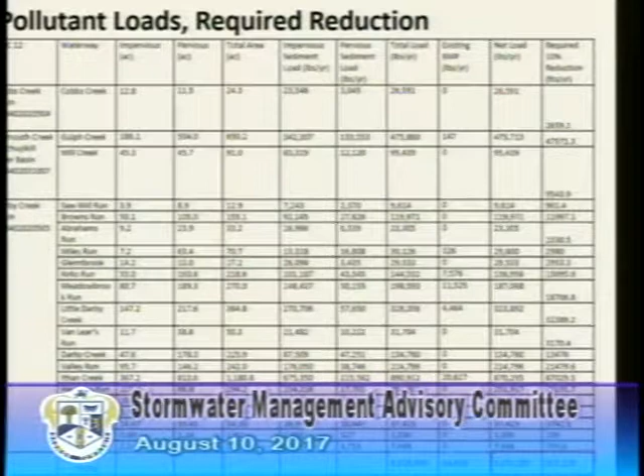Good, so they can get all the background of what it involves. So this was the table as it came out in the draft PRP of the required 10% reduction. It's 307,000 pounds of sediment.

So the next task is to identify, and if you'd like me to explain, this is each of the 3 major waterways, each of the streams, using the DEP simplified method and the Township GIS, updated with the Delaware Valley 2015 land use, and we parsed out areas that don't go to the MS4 storm sewer.

So based on that, using the impervious areas and DEP's methodology, we came up with pollutant loads for each of the stream segments. Then where BMPs have been built and the township has information that can be documented, we took credit for what pollutant reduction those BMPs are already providing, and that reduced the net load down to

3.072 million pounds of sediment is the township's current estimated load to the MS4 system, and you're responsible for a 10% reduction in this 5-year permit. So 10% leaves us with 307,000 pounds of sediment to be managed in different projects over the next 5 years.

So the next task is to identify potential projects, what their potential load reduction is, and then develop associated cost. We don't have costs yet. We have pollutant loads for the different projects and the types of projects.

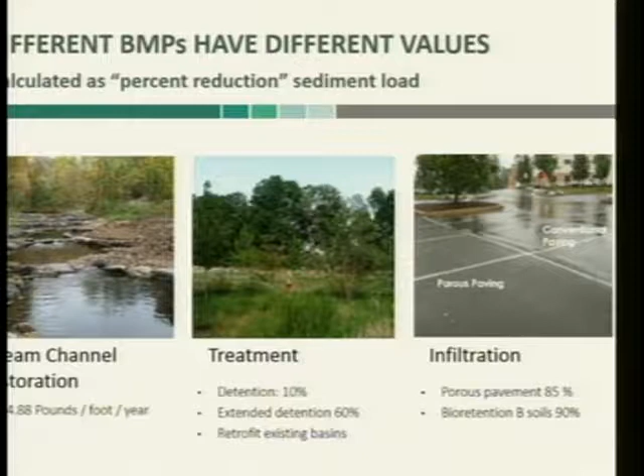And we also looked at the projects that were identified in the CH2M flooding study. So where those projects have been identified, we've pulled those in. This gives an overall summary of the projects that are in the draft pollution reduction plan.

So there's a total of 25 total projects, I guess, and you can see how they fall out in terms of the watershed they're in. Most of them are in the Darby, 17 projects, your biggest watershed. 1 in Cobbs Creek and 7 projects in the Plymouth Creek, Schuylkill River major drainage area.

In terms of types, we've got a lot of basin retrofits, we've got stream bank restoration, and you can see how they break out.

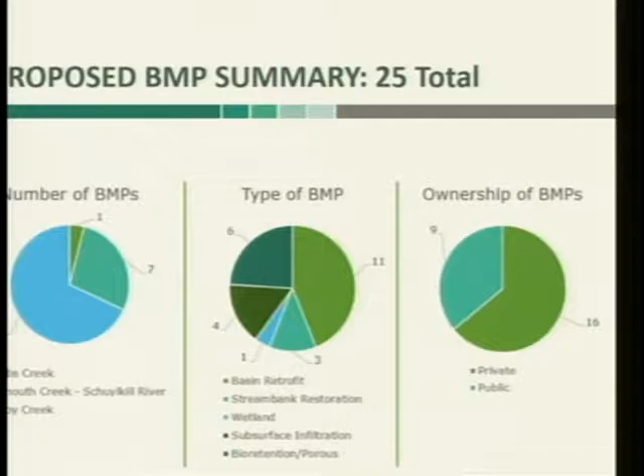And then I think an important topic is where they are in terms of public or private property. Although we have 16 on private property, a lot of those are basin retrofits, so they're private property, but they're basins. So hopefully those would be good candidates for retrofits, even though they're managed by an HOA. So any questions with any of this initial stuff?

Could you explain the difference between the land cover and the sediment loading so that people know? Yes, that's a great question. Yeah, if people are curious, if we go back to our tables here.

DEP allows a couple different ways to estimate your pollutant loading, and one of them is what they're calling the simplified method, where you just look at whether the surface is impervious—a road, a roof, etc.—or pervious, like lawn or woods. They've applied strict pounds per acre per year values: one value for all impervious and one value for all pervious.

That's not absolutely true, and DEP does let you do other methodologies where you look at the different land use types. We did run some early numbers several different ways, parsing and not parsing, and found that this was giving us our most effective numbers for Radnor for this initial analysis.

So it's literally pounds per acre per year from pervious times the number of pervious acres is your pounds from pervious in terms of sediment load, and then the same thing for impervious. We don't have the actual pounds—I don't remember what the numbers are. Do you, Mark? I don't know if we put them in the PowerPoint.

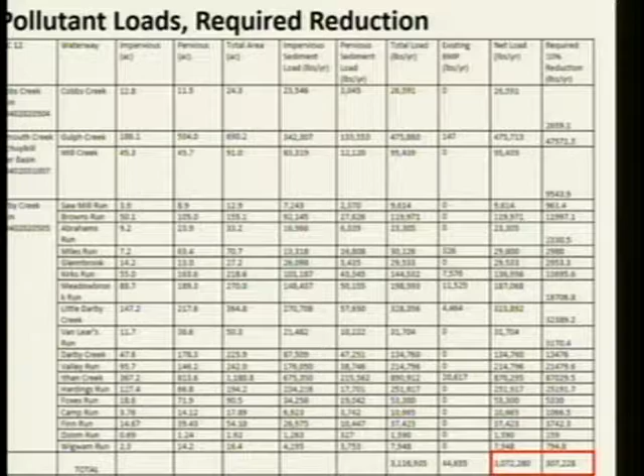You want to focus on capturing as much impervious area as possible, because that's where your load's coming from in these calculations. We have a table later that looks at the different BMPs and how much impervious they're capturing per their drainage area, so you can look at efficiencies.

Does that explain it? Yes, because I wanted to point that out since not everyone understands that. As well, when we're looking to revise our stormwater ordinance, simply removing impervious cover throughout the township could help assist in meeting these goals. It can't achieve it alone, but it could help, and all of those things can add up.

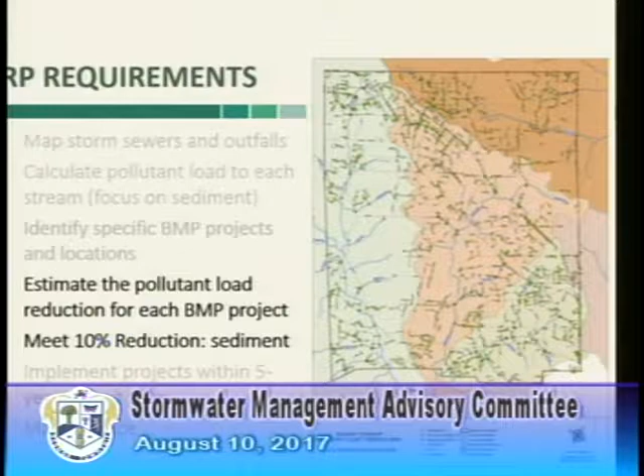So this is sort of the summary, and the next step we've been busy with is estimating the pollutant load for each BMP and looking at costs. We're in the process of developing costs, and we're striving to have initial costs to talk about at the Board of Commissioners meeting on Monday.

Mark will be here in the hot seat then.

So we put more practices in the draft PRP than Radnor needs to meet its required permit goal. We overshot because you're going to make choices. You can see your requirement is 307, and we were at 433 potential. But not all projects are equal.

Down at the bottom in the red box—I'm sorry, it's 307 and 432... 433. A lot of your load is in the Darby, because that's your biggest watershed.

For each of these projects, we have a general location of where it's in the watershed, the drainage area to the project from the GIS, what the project is, and how much impervious it's capturing and what your load reduction is.

So we can scroll through these if you'd like to get a general sense of what's where.

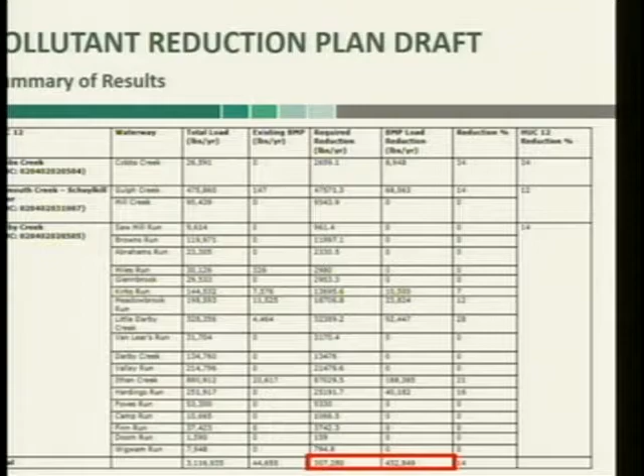But do you want us to jump right down to Darby if you'd like? I think that's our biggest, in general, concern from a magnitude standpoint.

Well, the one thing we do have to note is that we don't achieve compliance unless we do every watershed. So I'm just looking at the time you have tonight, and if we start on the largest one, which is going to be the greatest magnitude from a project and cost standpoint, yes, it's across the board, and that's what the Meliora plan shows.

So going to the board meeting next week, this is for both of you. Are we going to go in with the whole MS4 and the additional projects, or are we looking to the board Monday to see this list of projects and say, okay, we're going to do A, B, and C and not X and Y? Or are we just going to submit everything, give us a little flexibility, and then go back in a year if we had to and amend the plan to be more specific?

I guess yes to all of the above. So what we're going to do is meet again Monday internally and try to give a palette of projects to the Board of Commissioners. It's a lot, as you can see, a lot of projects over a 5-year period. There are big questions about the feasibility of even getting them all constructed in that time, with permitting and the ones on private property, negotiating with the various HOAs to get that done. But it's the law, we have to do it. We'll present that and have them give us direction. But as Michelle has said all along, very tight timeline, we need to meet the requirements. So literally, once we submit and we've met our deadline, right back to the drawing board, and we start getting deeper and deeper into what we need to do.

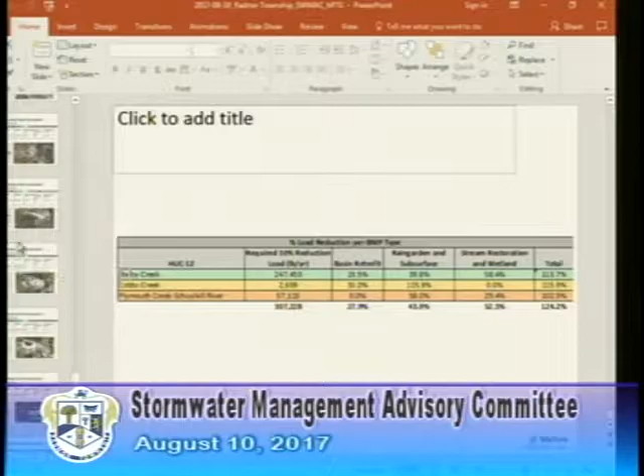Let me ask a question about that slide. Again, for me and for the public, is there a fraction accounting for each of those that leads to that percentage? Yes, we have a table for each project that says how much pollution load reduction it does. So when we add up all the projects that are basin retrofits, existing detention basin retrofits in the Darby Creek, the ones we've looked at in the PRP get us to 15% of the required sediment load reduction in Darby, and they're going to have a cost as well.

But does something like a stream restoration give you more bang than a basin retrofit? Yes, yes. And so what we're starting to look at is cost per load reduction, and we have some tables we're not ready to share yet, but we'll be ready, I think, on Monday. But yeah, where to start?

So let me jump back up to... just a further question about the methodology: you picked the basin retrofits because they're the least expensive, or the quickest, or both? Both, they're cost-effective. The infrastructure's already there, taking your stormwater to one place, so they're cost-effective, and they give you a good pollutant load number. Kind of a quick question on the basin retrofits, is there any characterization of what that is?

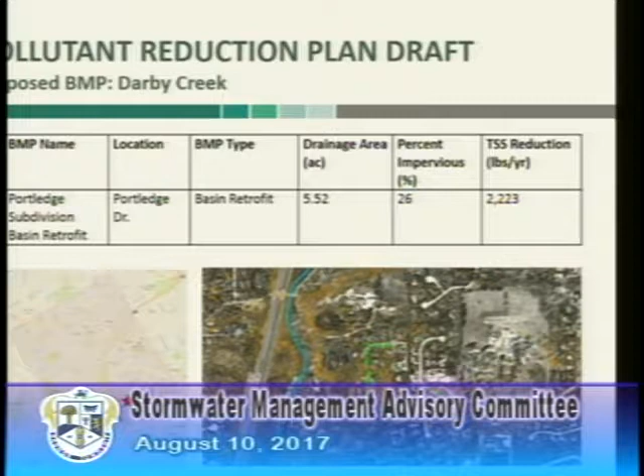I can go through these quickly or slowly, whichever you'd like, if you want to talk about what these are and where they are, or I'll just roll through them. I think you should just go through them unless further clarification is needed.

These are all basin sub retrofits, and we've met with Steve and your staff to go through a number of the basins in terms of what are good choices.

The Portledge Basin that was just shown is off of Clyde Road, directly upstream from Ithan Creek. Prior to this whole topic ever coming on board, we'd already met with the HOA concerning their basin, so it looks like there may be a good possibility of working something out. The carrot would be that the HOA would no longer be responsible for the basin, so they get that off their table.

But there is a process. There's going to be indemnification and memorandums of understanding. So five years sounds like a long time, but I think the pipeline is going to be a little bit slow till you can really start cranking these things out.

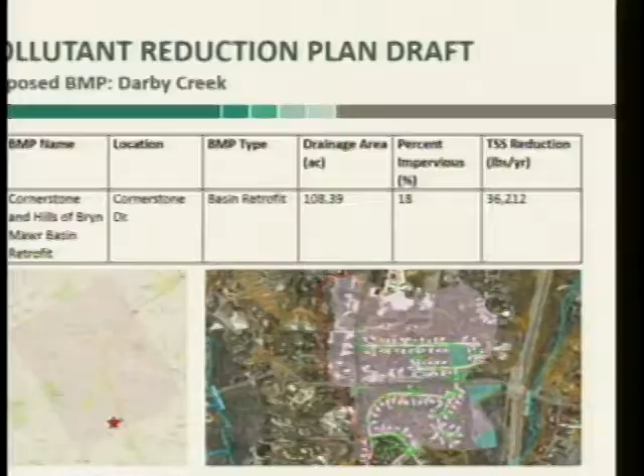Cornerstone Basin, that's a pretty big drainage area. It's go, a really good one actually. If you go down Bryn Mawr Avenue, southbound from County Line, from the hospital, eventually you cross Mill, and on your right is Ithan, which is also the creek. Just below the Blue Route, on your left is the massive basin for Cornerstone, which has an old-fashioned low concrete, low-flow channel.

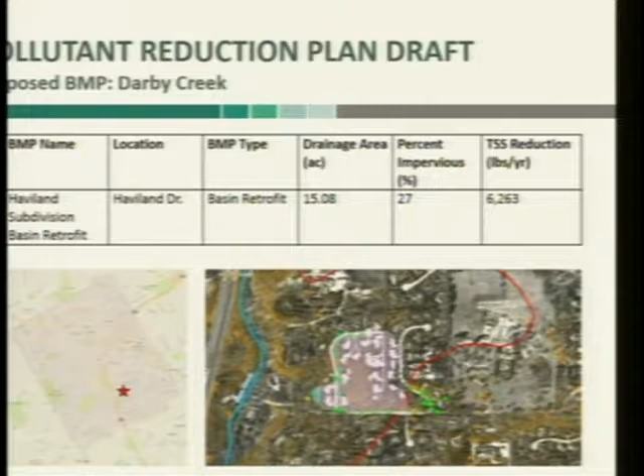Was this something that Dan talked about? There was some project around Veterans Park. I just wanted to make sure there's a connection. There is. Okay, and where we've used the CH2M projects, the drainage areas and the costs we'll be sharing are all from the work they've already done.

So this is stream restoration. Just a quick question on that one — is it also a flood reduction measure? Yes, thank you, yes.

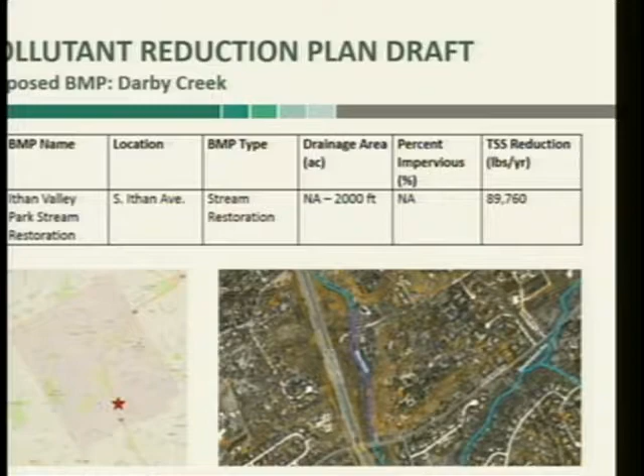Ithan Avenue stream restoration — this is the first stream restoration project, and as you pointed out, Steve, it's something the township has already considered. We did a bond issue for our parks, and Ithan Creek runs through Ithan Valley Park, where part of the stream is severely eroded, affecting a very old wall that runs along Ithan Avenue. So there's already a small amount from the park standpoint for that, and it seemed to make sense to address this creek. It's highly impaired, we get great return on the dollar for doing this kind of work, and there's already an impetus to start.

And you can see what a big player it is in your 307 total, how important this one is.

So, another park project with a potential infiltration bed. These stream restoration projects again give us good pollutant reduction in the DEP credits. Another basin retrofit, getting highly impervious in Devon Square.

I'm sorry, I don't mean to interrupt, but I have a question for the SWMAC. So the Warren Filipone parking lot was part of the bond issue for the parks.

And I'm in the design phase of that, and basically the parking lot has failed in many places. So I just pose a hypothetical to the SWMAC, which would maybe go to the Board of Commissioners. Instead of just doing the normal repair, which is basically mill off the entire surface, redo the subgrade, and then pave the lot, perhaps it would be feasible to still do that much with the bond money, but add stormwater fund money and get one of our first infiltration parking lots in the town, other than what we have at Clem Macrone on the pads.

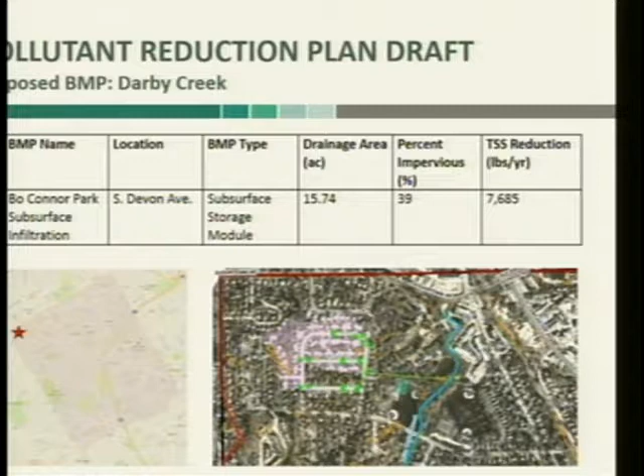So again, I think, at least my interest is where can we get flood reduction as well as... These two, like I said, Chagrin Valley called them out for flood reduction. CH2M called them out for flood reduction, both these parks. And Meliora is calling them out for sediment load reduction. So I think exactly what you're saying is possible.

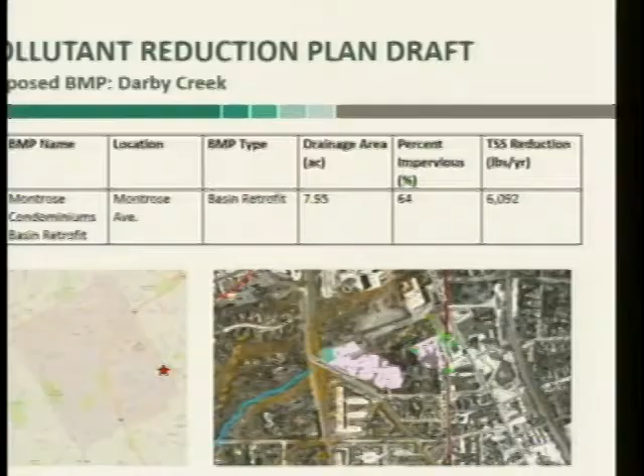Okay. Another basin retrofit at the Montrose condominiums. So these are all in the same vein. This would actually be a new project, putting in a bioretention area at the Radnor house. We get a pretty good load reduction in drainage area, but the costs go up with the newer systems rather than the retrofits.

Can you go back to that one? That's a pretty steep lawn, right, in that area? Here, where's my? On the one side. So you're down at the bottom, or you're up at the top? I believe we're down at the bottom, but we were also looking at where the piping network could convey water to and where it could fit in topographically. And these are concept level, so.

Yeah, because I don't think anyone actually uses that ground for anything, right? It's just mowed lawn, I've never seen anyone on it. So that might be a good thing to look at. There's some utilities that go through there, but they can be moved. But it's not like it's a park or a used space. No, it's private property, it's theirs. But they don't really use it for recreational purposes. It's just decorative more than anything.

And where we show a new project like this, when we show a footprint, a size, we're following the DEP guidelines in terms of drainage area ratio to project footprint size. So they're following the design guidelines.

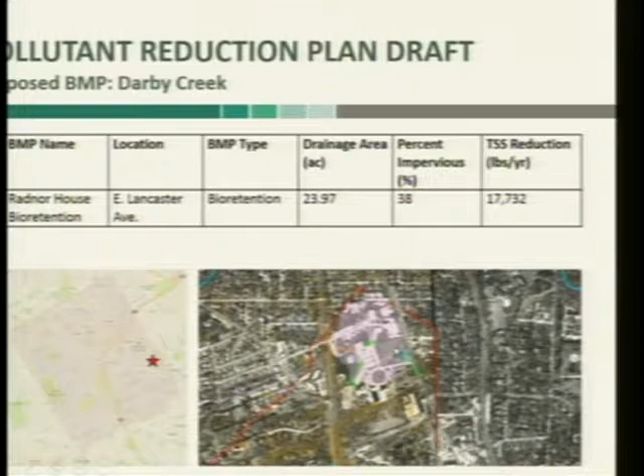Villanova campus improvements. Are these additional ones, Mark? No, these are what's already there. Oh, I know what this is. This is because they're not built yet. They're not, that's why they're included. So this is the Villanova project. So it gives you credit, gives you good credit.

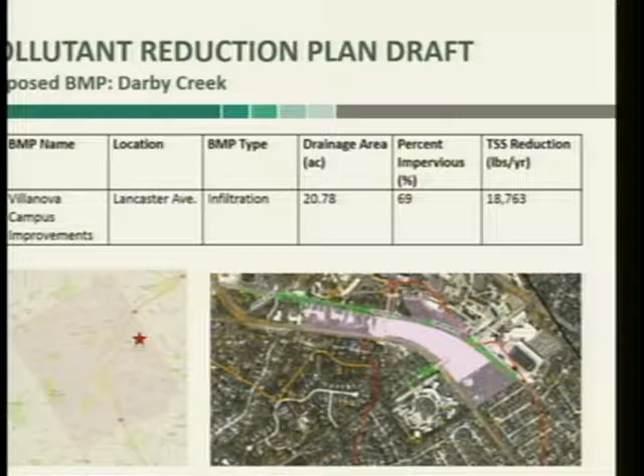This one is a big parking lot, and it could do a good load reduction. Our initial costs are also showing this to be expensive, and it's on private property. So these are the factors that'll come into decisions and timing. So that would be like taking the whole parking lot and making it? No, this is taking select areas for putting in bioretention areas or retrofitting. I think there was also a small basin. So it was retrofitting a parking lot. But even so, it was a bit costly, you're saying?

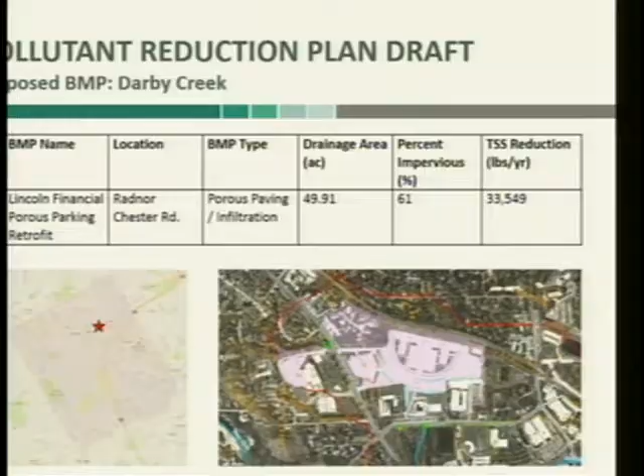Where you retrofit, the costs are higher than where you have a basin. Is it because of the pipes that are required mostly? And more structural work. Yes. We do have some current projects that are going through approval processes, and we're mentioning to them, you know, if they can help us with our MS4 while they're constructing. So you may be getting contacted by some project. That would all help.

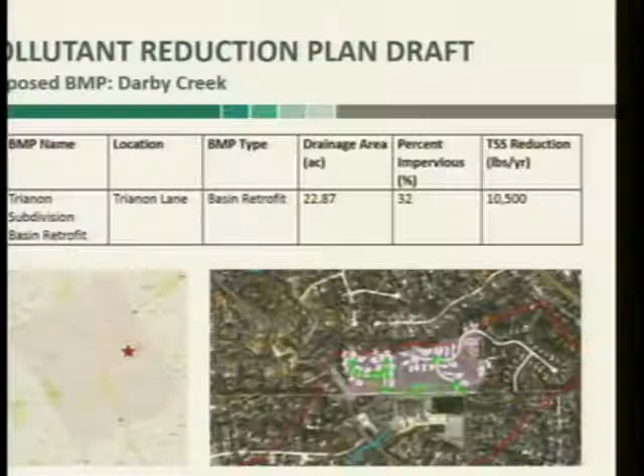Okay. All right. Same thing, a retrofit at the basin next to Lincoln Financial, the property next door. And I think across, at the subdivision, there were some opportunities for retrofitting basins. Where was that? Oh. Yeah.

So it's a lot of data to read, and you can see where we are percentage-wise. Our goal is 10% sediment reduction per stream, and you can see where the projects are taking us. This one in Cobb's is over-designed, but there aren't a whole lot of opportunities in Cobb's, and the permit requirements will continue. There'll be more permit requirements next 5-year cycle, so you would essentially be able to bank credit for the future.

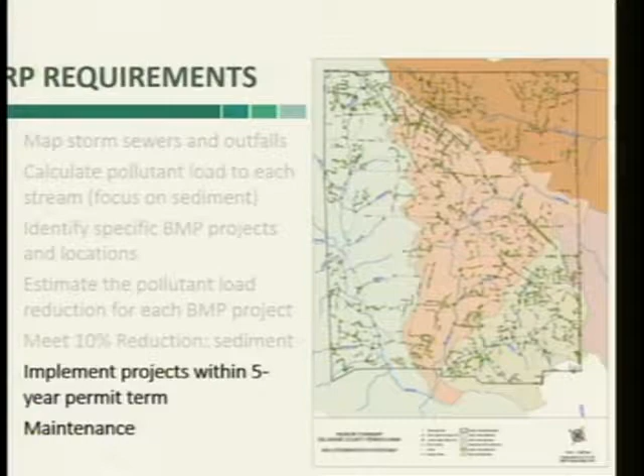Then the question is priorities and implementing them within a 5-year period, and also coming up with maintenance plans. This is the sequence of events and next steps that we'd shared at the Board of Commissioner meetings. So the draft is out, and we need to submit by September 16th and determine the implementation.

Did we go through Cobb's and Schuylkill? We skipped them. Oh, that's right, because we started in Darby. I can scroll back and do. Let me go back to those, because that would be helpful since there's only one in Cobb's. There it is. Where's the? There we go.

So there's not a lot already existing in Cobb's, and there's not a whole lot of opportunities, and we didn't see any good basin retrofit opportunities. But what we did notice is that the Radwyn Apartments is a pretty dense area and has good opportunity for bioretention installation along the edges, and all the drainage is coming this way. So that, as you saw, gave us significantly more. Can you give us the context, the road down the bottom?

Boy, I don't know. Do you know, Steve? Yeah, so the Radwyn Apartments, and I get confused between my apartments too. They're off of Bryn Mawr Avenue. Okay, and so this is north of that Cornerstone Basin. So the horizontal road is Bryn Mawr Avenue, you're saying? Hang on. I'm having trouble seeing it all, even with the big screen. Yeah. And I apologize. We've been working at such a pace. We don't have all our graphics labeled. Oh, I see. Okay, something is the beginning of a label on that one road, but.

If I get my big map of this, I could tell you, but the apartments give us a little bit of hope because there's our residents that live around these apartments, and most of these were built and they predated all our stormwater management. So if we could do some sediment load reduction and help some of our own residents, because it's strictly conveyance at these places, a lot of them, it just goes down the hill into an inlet through a pipe, or it just sheets off. So we looked at some of these.

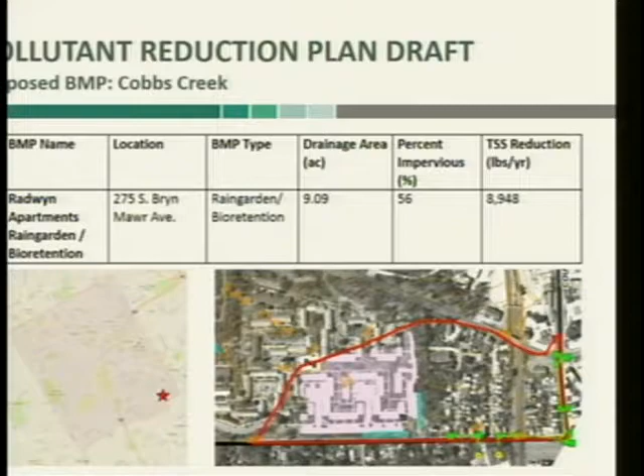Well, unless we come up with something different between now and your revision to the PRP next year. Yeah, we have the opportunity to revise the plan if something steps up in the meanwhile. Or if a door closes on us. And that's what we were saying. So we need to submit by the 16th, get this in. And a lot of how this was done, Charles, was we have these maps out. You're looking at impervious surface. We have plans from things that were done, trying to grab things in that fashion,

plus our own local knowledge from our staff. And I think Cobb's is rather limited because there's such a tiny area in the township. You're constricted to that area in the township that goes to Cobb's, because it goes the opposite direction. Honestly, I think if it came down to it and this was not feasible, we could probably do some trading at some point.

I think potentially they would be obviously open to us making that improvement in another area if it was technically infeasible. Right. But for purposes of meeting your, yeah.

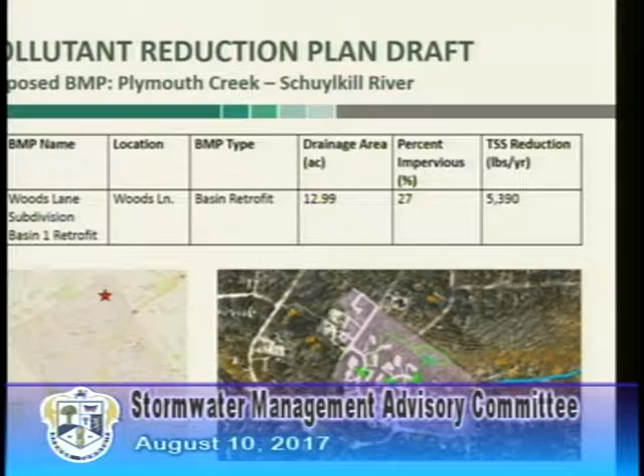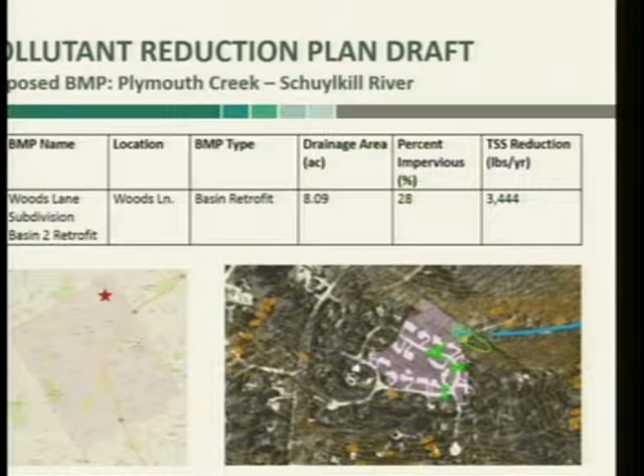I think we looked at this one. Another basin retrofit, Woods Lane subdivision. Two basins there, and then the North Wayne Field basin retrofit.

This one is also a nice load for what it is. This is something different than what's before, so it was removed from the agenda, but what the board directed us to do was clean, repair, and put in a sediment reduction BMP. This is outside that.

Again, looking at land that may be available is how we start to do this. We're looking at maps, and that's how the big Brandywine Realty Trust property came up, when you look at that from an aerial, all you see is a sea of paving, and it draws your eyes to it. Now, as Michelle pointed out, it's not necessarily the most cost-effective way, but between what we know, the developments, the maps, the information we had, that's how we start to do these.

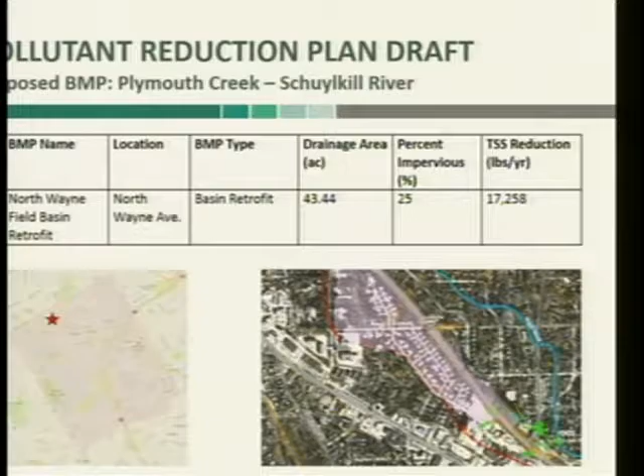I'm not saying that the North Wayne Field Basin is something that could occur. It's a possibility, noted as a possibility, a place where you could do a project. It could even just be that we put in pretreatment, different levels, and maintain it.

Does this proposal mean that we're holding up the repair? No, I think they're mutually exclusive at this point. The direction from the board came a few months ago, the RFP went out, very specific based on the board's direction, and this came out after that. Monday night, this very well may be a topic of conversation. Again, when we pick these, obviously this is school district property, a lot of these are private property. We don't know that we are able to implement these, but we're noting that this is a property where a project could be done, and here's the type of project you could do.

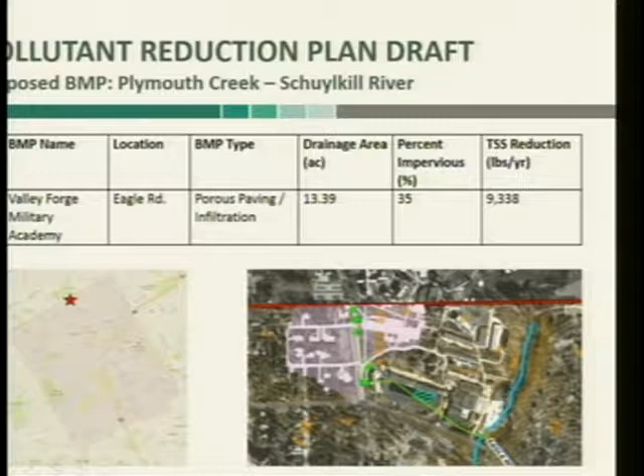All good questions though. Okay, Valley Forge Military Academy, again, private property. This is looking at doing porous paving and a stormwater bed that would collect water from both the academy and from the street. So it's a mix of public water on private property, so those may or may not be feasible.

Steve, when I was driving up Eagle, and you come around, go down, then come around the curve, I noted there's an area they're maintaining that is unmowed on the right side as you're going up the hill. I wondered if that was coming from where I live, from King of Prussia Road. I wondered if they're doing something there, would they be amenable to doing something like that somewhere else? I don't know the exact spot, but I think that's a great question. The grass is this high, it's unmowed, clearly hasn't been mowed in a long time. I wonder if they're doing something intentionally, or just letting it go, but our project would definitely look nicer. I think that's a great idea.

Talking about on North Wayne Avenue? No, if you're coming up Eagle, where the entrance into Eastern is, into Cabrini, and you go up the hill, down to that bridge, then on the right, just before the building, is this big unmowed area. So maybe this could substitute for that, or...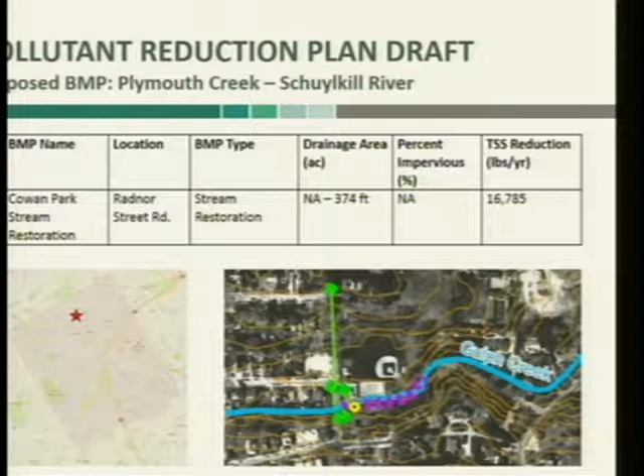Okay, and then we're into Darby, so I'm going to jump to the end again. Table.

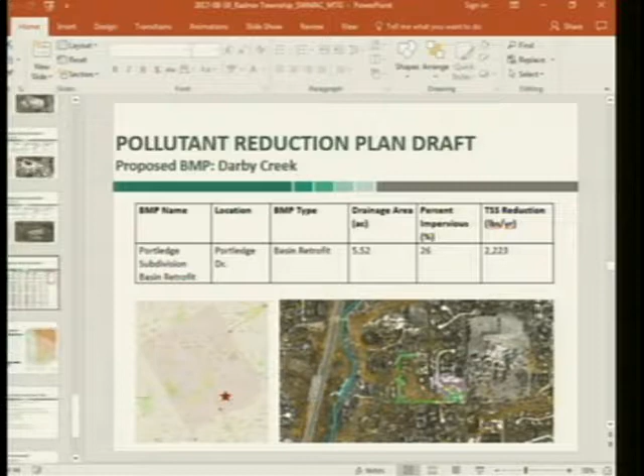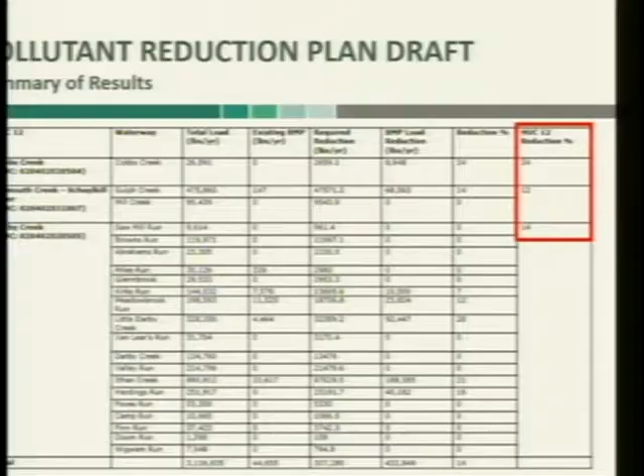Michelle, do you want to touch briefly on the requirements for stream restoration to count for credit? Well, DEP hasn't been entirely clear on exactly the requirements. They're basically general requirements around removing and restabilizing the banks. They haven't necessarily required full analysis of stream channel capacity. So if that's the case, then doing these small little retrofits is fine because you don't have to put a lot of... Well, yes and no.

I think DEP's guidance will be evolving over this permit term, and the permit will expire in 5 years and then be renewed with additional requirements. So we would urge consideration of projects that show in-stream water quality improvements, especially if they're immediately at an outfall of a retrofit basin, if that starts to show better aquatic life distribution. That's where DEP has indicated their goal is, to get in-stream water quality improvements. So if you're showing in-stream water quality improvements, you're meeting the department's goals. And if you're not, even if you're checking the boxes, your permit requirements will never end. So some consideration of healthier streams is worthwhile.

I guess my concern about some of these stream restorations is that we won't have the land area to do what they're really looking for us to do as a stream restoration, because in that location in particular, you just don't have the room, the backyards. Right, so we may never be able to meet what they're looking for in that area. Even though we can make improvements, they won't be what the intention's goal is. In terms of like width?

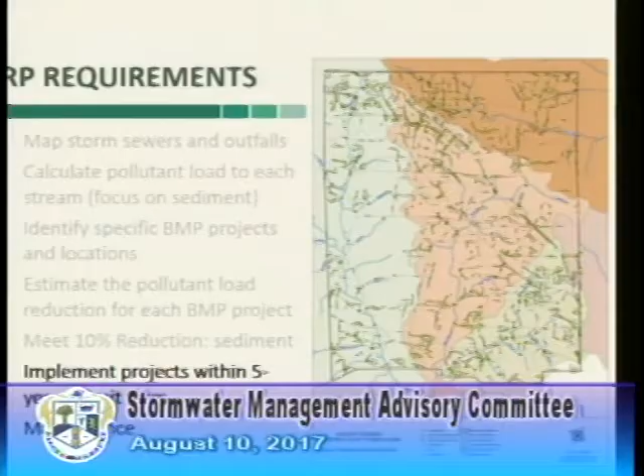Which leads to implementing the projects within a 5-year permit term and making decisions about maintenance, maintainability, and the cost of maintenance over time. That's a question I had for you. What are you envisioning as far as maintenance for these projects? Would you think cost effectiveness would be to train in-house staff or to just contract that out, say, if we were to implement this as proposed?

Yeah, I guess it depends how many projects need what types of maintenance. There are certainly good contractors available now that can do basin retrofit maintenance, things like that, and that know what they're doing in terms of plant species and mowing regimes. Say basin retrofit, what do they do when they do a maintenance?

And I could share a funny story with that if you'd like. Sure. Years ago, we worked on, gosh, this goes back to 2005. We worked on an early basin retrofit for Sidley Basin in East Whiteland, and we had talked to the township about it, it was a giant basin they were mowing every week, and we said it'll save the maintenance crews mowing it every week. So it was retrofit as a meadow and revised structure, and there's signage and a lot of amenities that go with it. And it took 3 years to get it established, and we're like, great, it's all doing great.

And then we got a phone call from the township saying, what did you tell us? Our maintenance guys are out there for hours. And we went out, and it was June, and all the flowers were in bloom. And they were weed whacking around the flowers as if it was Longwood Gardens. So we said, just mow everything. And that was a lesson to us to give a laminated maintenance plan to the maintenance crews, because no one ever tells the folks on the mowers what to do.

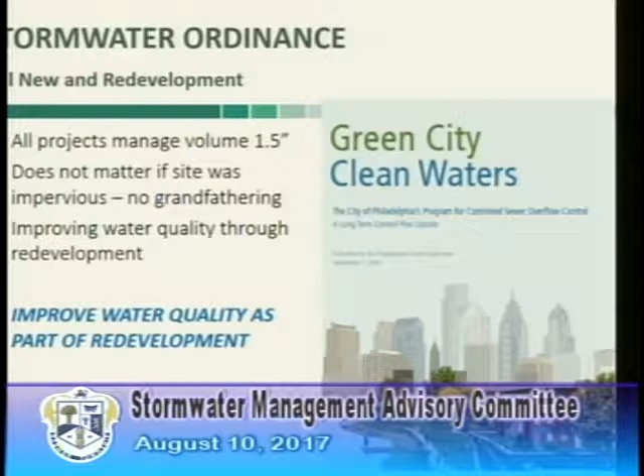So it's something that's probably worth discussion in the context of your ordinance. And there's precedent in the city of Philadelphia, and they haven't -- they're continuing to see the development. There's also precedent in nearby Tredyffrin, where they have pretty rigorous redevelopment requirements, and it hasn't slowed redevelopment. So something to think about. I think we're all in support of revising our stormwater ordinance, and we've put some things forth for quite some time. However, I don't know that using what Tredyffrin uses and what Philadelphia uses is the right answer. Right, it's something to look at.

I think you're so vertical in Philadelphia, it's a totally different story. You're so impervious, and we're talking about a CSO. It's a completely different situation.

Here in Radnor Township, some areas are under different requirements than others for reduction of peak rates. However, we're starting to look at it—really the main offender is the grandfathered impervious cover. So that's what we really need to attack, and how we do that needs to be discussed.

But if we can somehow use that to our advantage—I don't think the DEP is going to give us credit for the ordinance, but we'll see the real projects, because we have continual redevelopment here in Radnor. So it's not as if once we put that in place, we have to wait around for 10 years; it will happen within a year.

And construction, not just—I would raise anything that's worth the township's interest with DEP. It doesn't hurt to ask the question. We can ask. And the thing is, the goal is to meet the requirements in intent as well as legally.

Exactly. So I think by addressing that impervious grandfathered area, we'll do both. You're in the right direction, absolutely.

So this is the table I had pulled up earlier. This hasn't been cleaned up yet, but having looked at the individual projects, it has a little more meaning—just summarizing where your load reduction is coming from in terms of the different types of projects. And for Monday night, we'll have costs associated with the different projects, concept level costs.

So are there any other questions, or anything else you wanted to go back and revisit?

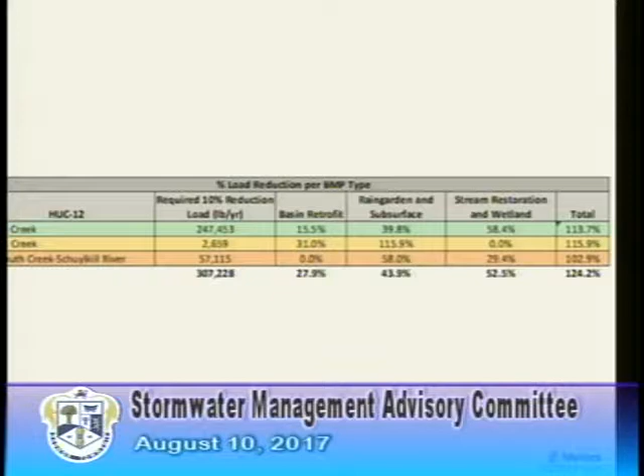I just want to say, I thought you guys did a great job. Thank you. You had a really short time span, and these guys really put together something well thought out, that I think we can wrap our arms around in a very short time. So, thank you, that was much appreciated.

Not only with your expertise, but your understanding of where we're coming from as a community—I think that makes sense for us, what you're putting forward.

Thank you. And I have to say, a lot of this we anticipated. A lot of us are paying attention. And had we not had that CH2M study, this couldn't have happened in a practical sense. This would all be fantasy. These are actually realistic suggestions that I can see enacting.

I would agree that the CH2M study definitely laid the groundwork. It was very useful for our work.

Just to add on that—Meliora has been a pleasure to work with. Mark has done a yeoman's job on this. He beats us up for information, whether we have it or not. And they've done a bang-up job on this project.

We would have never been able to get to where we are without all the groundwork, as far as the stormwater infrastructure being in the GIS and all the information provided from CH2M, because we would have been starting from scratch. We would have not even come close to documenting where all the inlets are in Radnor and stuff like that. Steve and his crew have scrambled to give us that, as far as existing plans and things like that.

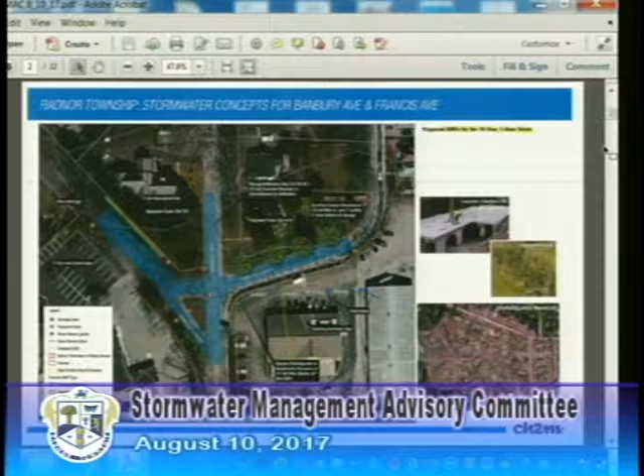What we had discussed for the board meeting tonight was to take a look back at Banbury, understanding its current situation. I sent you folks a bunch of slides, and there was a lot of repeats. The CH2M naming and numbering system leaves something to be desired. I don't know how they do it, but I have them all, and it's just a matter of going through them.

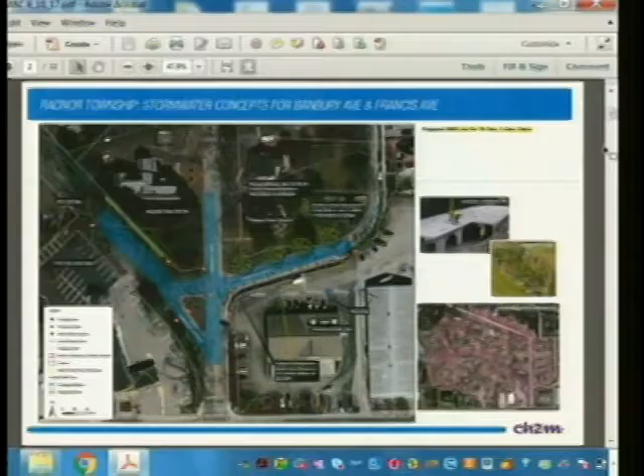So what we're going to do is start with the Dan Weibel, CH2M concept plan that the RFP was based on. You can see, based on what they did, the footprint was not as big as it became in the design. So I guess there's a couple of things we need to think of here. We were at 50,000 feet, and we're at about 25,000 feet here, and then when we hit the ground, we saw the huge difference that occurred.

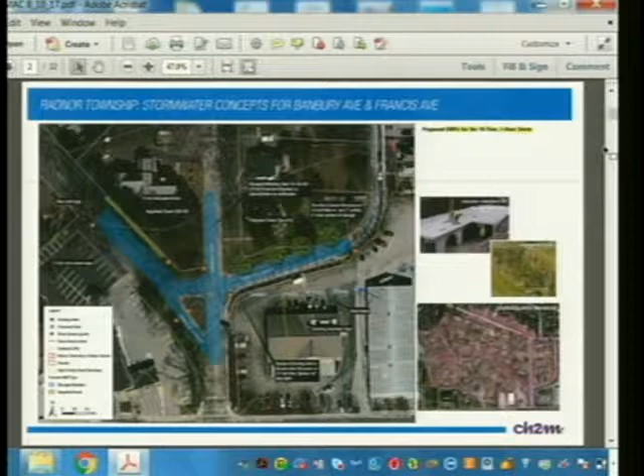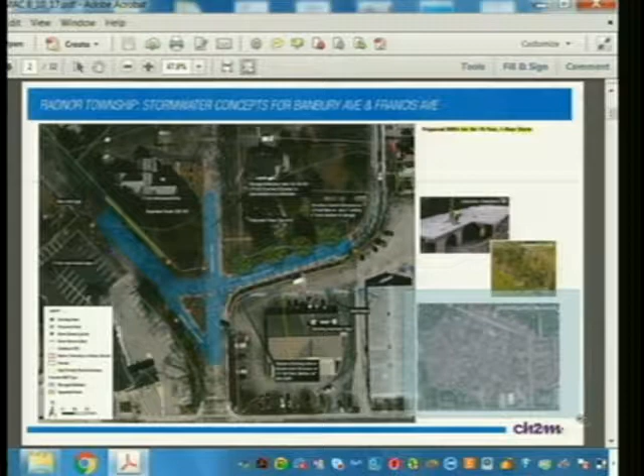So if you look at this, Dan, or I should say CH2M, calculated storage quantity, if you look at the drainage area. We did have a couple resident meetings, and the drainage area is pretty densely populated. They're not huge lots, you can see there's a lot of streets, there's the commercial that's there, and obviously the homes. So let me get back.

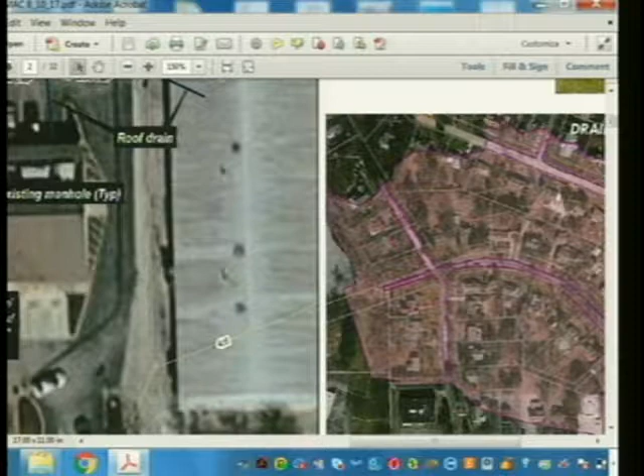Maybe not. The next slide, again, is one. I'm sorry, this one was for the original one that the board approved as far as the magnitude. It was a 25-year, 1-hour storm event. Thank you. Actually, we're at like 40.

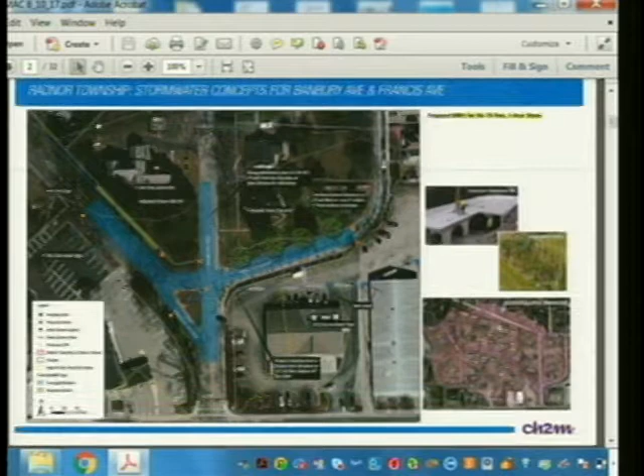And the next slide, we have a 10-year event. You can see, basically, the configuration is the same. It gets narrower and smaller as we go from the 25 to the 10 to the 5. And this one is the 5.

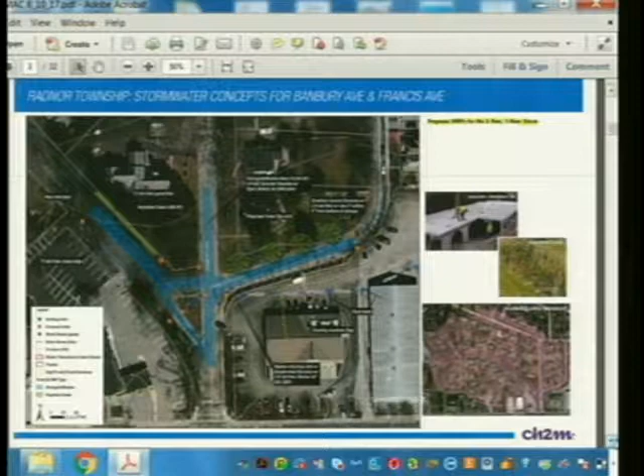So Steve, the 25, just so I understand it, if you're going up Windsor, is it the whole street width? No, it's close to it. Actually, if you look closer, they come in a little from the street. The island didn't change, we did not lose the two legs of the pork chop, as we call it, and it pretty much stopped at the bank, at the end of the bank parking lot.

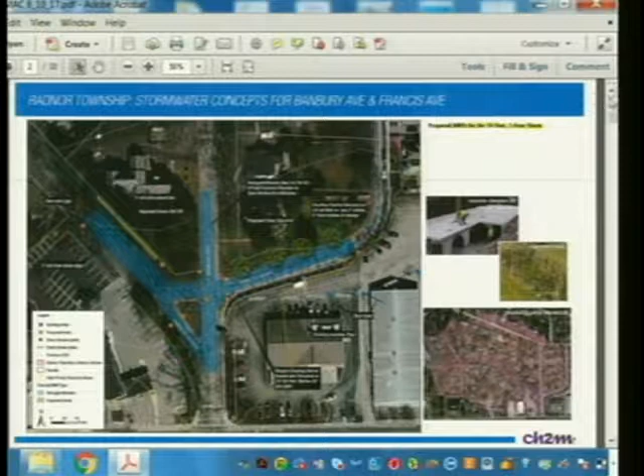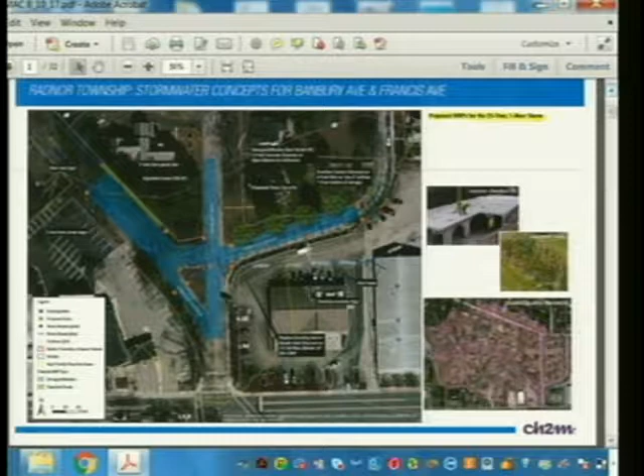It was wide, but each iteration, this is the 10-year I have up, and if I get up to the 25, again, it gets wider, maybe a little longer, and if you look on Francis, it goes deeper into the right-of-way. But that basic shape is what he was able to hold. This was at a high level. So here's the 5-year, and then we start looking at the T&M slides. Let me just pull this up for my reference.

So from what T&M's design told us, to meet a 25-year, 1-hour event, you were looking at 90,000, 93,000 cubic feet of storage. So as you go through each of these, you can see there's a table here where they're telling us, all right, this one only provided 14,000 cubic feet of storage. We needed 31 to meet this particular storm.

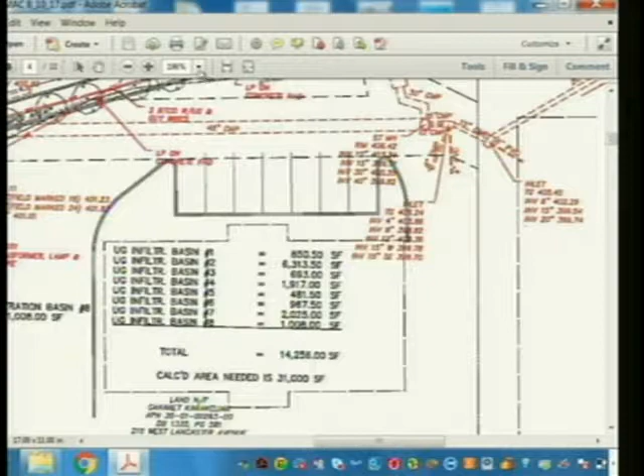And all these iterations we kept going through until eventually they came back to the board and said, we're unable to make this work within the confines of what the RFP was, and we actually did a change order. This was the one I think everybody is very interested in. So this one is the one that took some of the Wawa parking lot, some of the Anthropologie parking lot, including, like, behind the State Store. It went a little further down Francis, yet as you can see, it stays in the right-of-way. What I don't think most folks realized, that right-of-way really went back pretty far on that one corner property.

Steve, are you saying that the entire shaded area in those parking lots is within the township right-of-way? No, that is completely out of the township right-of-way. Okay. So what you see in the parking lots is out of the township right-of-way. So on the slides you're looking at now, this offered the storage we needed. This offered over 93,000 cubic feet. This was going to meet the criteria that the board determined that we should move on, which was a 25-year, 1-hour event.

You can see the impact is not huge on the streets. So if you go down to the traffic island, this is now the configuration that shows Windsor Avenue turn and meeting Francis head-to-head. The island becomes storage and a BMP. And if you look, it does not go far back up Windsor at all. It does go up Banbury a little bit, but not a huge amount. So the bulk of that storage is in the right-of-way of Francis, in the street of Francis, and a huge portion is in those private parking lots. Now, you would net out a little bit of easement because we have an existing pipe there. But this is one of the projects that met the criteria.

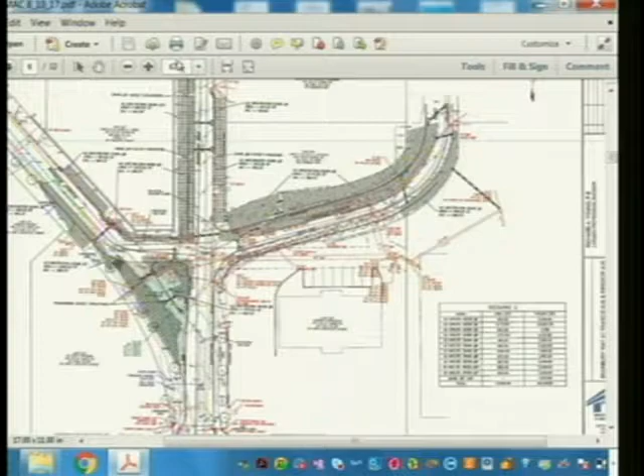Unfortunately, I have to look at my sheets because I can't read the screen. I just want to see the size. So, Steve, scenario 3 has 2 parts, because it looks like it's 1 of 2, 2 of 2. So it looks like most of it's down at the intersection of Windsor and Banbury, but really, if you flip the page, next one, okay, there's the series of beds that go all the way up.

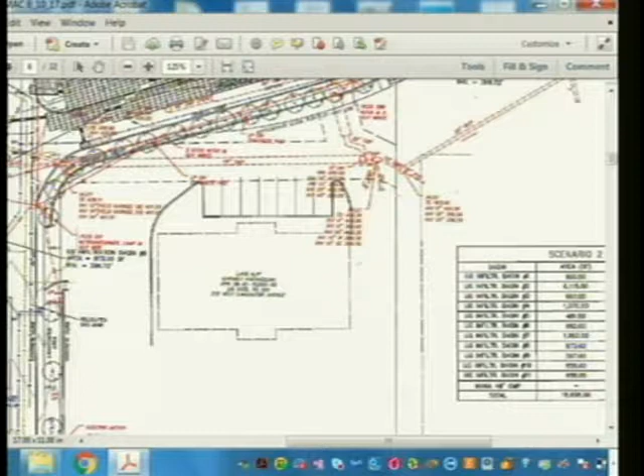So which one? I'm sorry, I was looking at 2. Looking at C, right? Concept C? Let's shrink this down. Scenario 3 was the 83,000, right, that you were mentioning, Steve? No, I'm sorry, concept plan, scenario 3. Scenario 3 is 83,000, that's the 10-year, because scenario 2 was 69,000. Right, and 83 is the 10-year, that's correct. All right.

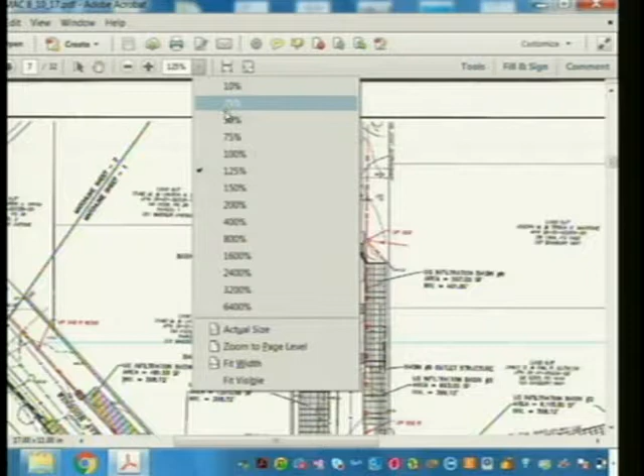But I just want to say, it doesn't just end at that intersection. No, it does, scenario 3 still does go up Windsor, but not with that huge impact that the final plan called for. Just a series of beds. I just want to make sure people saw that next page, that it's not just at the intersection. It still goes up Windsor. Right, so when we go to concept plan, scenario 3, sheet 2 of 2, this is what Heather's talking about. Oh, I went a little too quick, hang on.

So they try to limit the disturbance. As you can see, there's pipe, there's beds, pipe, more storage, and that ends up somewhere around Farm. Impact was a little less. The limit of disturbance was still considerable because we went all the way up the street. And like I say, that took us up to Farm Road. That was the longest reach, if you will.

The next one is concept plan, scenario 4, 95,189 cubic feet of storage. This is another 2-sheet plan. So the first sheet shows that very basic outline we were looking at, considerable storage along the Francis right-of-way. Minimal over here. We do go up Banbury. Once again, the island is reconfigured. There's storage. It's also a BMP. And then when we go to the next one, it's inclusive of the entire street.

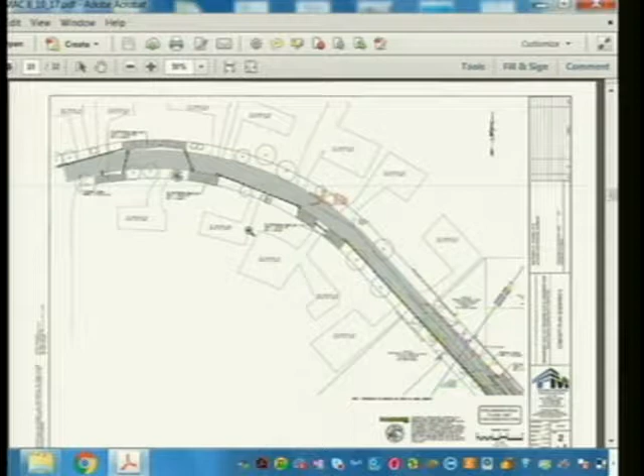So the one that we're looking at next would be concept plan scenario 4. I'm sorry, what? This is concept plan scenario 4. This is the one with the porous paving, which we talked about. Not as deep, but definitely still a full width road impact for the residents. This is the chart we've been talking about.

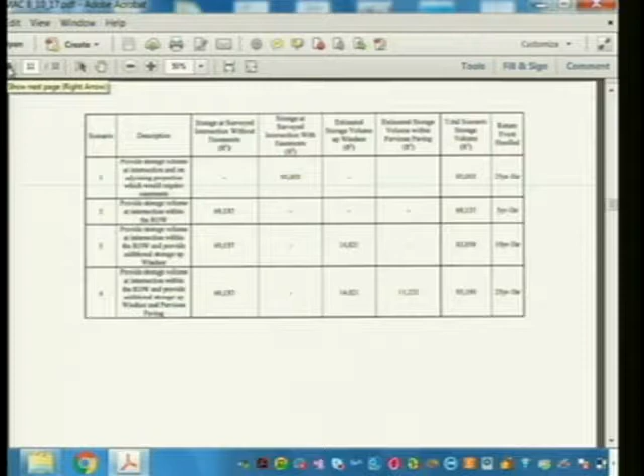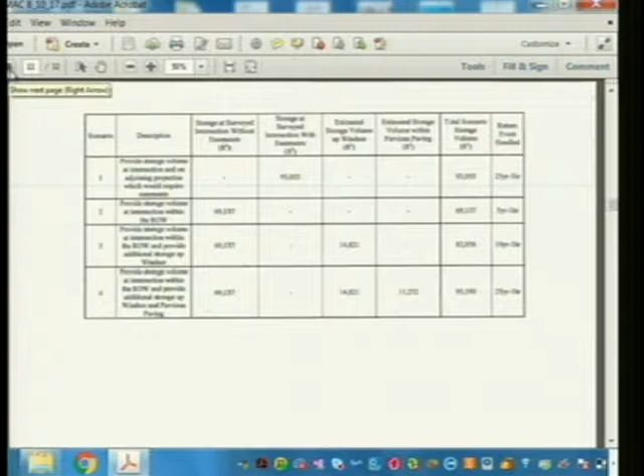Steve, again, this calculation is with the outlet pipe being high, not low. That is correct. So we brought this to T&M. They definitely concurred that the footprint would shrink some. I do not have the exact amount. So I'll go through this quickly because this presentation is an aggregate of some of these slides. The first one, again, is 93,000 cubic feet. This is the one that uses the Wawa State Store Anthropologie parking lot.

Hey, Steve. Yes, sir. May I ask a question? I attended a meeting with the residents, and you said at that time that you were going to take a different approach. You're going to start with the intersection, see what could be done there, what it would do, and then start to branch out. I don't see that approach at all. And thank you for bringing that up.

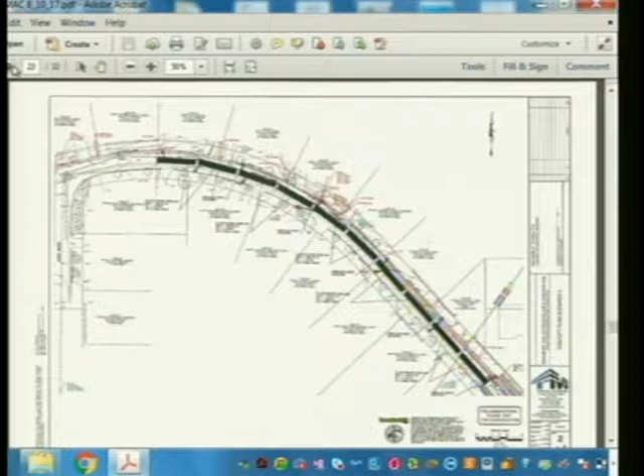So at this point, this was actually on the agenda, and it has come off the agenda, but it will be back on. We have asked the board for direction on Banbury, because the original direction we got was to move forward with the 25-year, and actually, I think we should just cut to the chase. Bear with me. It's back on the agenda for Monday or no? It is not. It's for a future, okay. So this is the plan that was approved by the board. Okay, this is the one that goes all the way up. I'm sorry, this is not. This is the bank one. Let me keep going.

This is the plan that was approved by the Board of Commissioners. This is the end that heads up towards Farm. This is the base. So if you look at it again, we have considerable storage along the right-of-way of Francis. We use Banbury. The traffic island has been converted. As we start to head up Windsor towards Francis, towards Farm, we then convert to a different type of storage, which I'll show you in a second.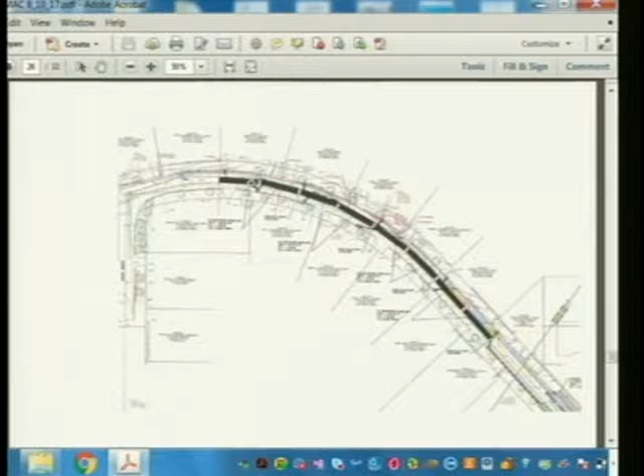So Charles, what we talked about that night, there was no decisions made, but the folks there that were from the area, I'll characterize, were very unhappy with the project, very unhappy with the impact of the project. So as the meeting wound down, we talked theoretically about what you just said: what if the project area was this? So it was Banbury down here and included this. So basically this very specific area. So from 30 down to here, over to here, and back up here. That was what we spoke about. That's exactly what I traced that night on the monitor.

But we don't have official word from the Board of Commissioners to move on that. So I have some concepts for that. So what we're going to ask the board is, we still have a contract to complete the original design. And we, the staff, did not have the authority to terminate that contract. So what we're going to be asking the board is, please provide us direction. And there's a couple of options. Move forward on the plan as originally determined.

Stop work on the plan, and let's move forward on what was discussed that night. The board may have other options of their own. So right now, no, we are in a holding pattern.

There's no doubt, and this was the area, and we've discussed it via email. There's only so much that can be done in that area. We were backing into it instead of saying we wish to address this storm. But I'm hoping we can get creative. I think there's a lot of things we can do. I'd still like to add the parking lot of the bank because it's outside of the residence.

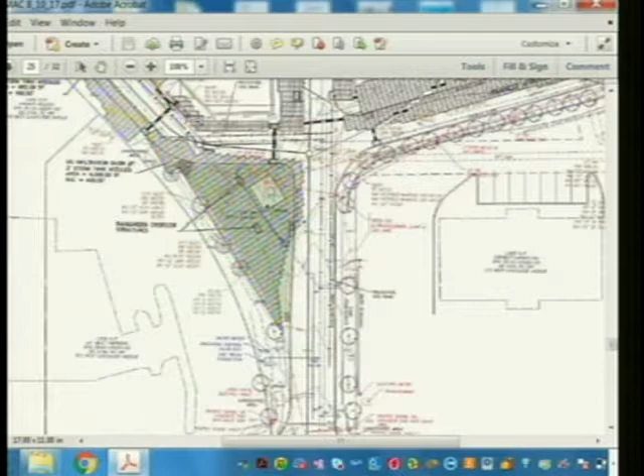Could we add the bank? I'd love to add the bank. What would that do for us? Could we add the road section of Francis? What would that do for us? Banbury - we get a road section of Banbury. We're not killing lots of trees yet, and what does that do for us?

So these are the types of questions that these residents would like to have had answered. They didn't want to approve this large project that took out all their trees and dug up all their roads and so on, without knowing what else was possible. This is an enormous amount of money and work in this area.

I guess I'm hearing two different versions of the meeting, and I wasn't there, but I think it's one and the same. So they had an all-or-nothing thrown at them. Well, I mean, there were many people at the meeting, so some folks did not want to do anything. Others were definitely amenable to doing something. Other folks did not want this impact.

And I had the arborist report there. Some trees, there's no doubt, were going to be lost. Some would stay. And Charles is dead on, though, that the impact was basically from Windsor, from Farm to the intersection - all these streets were going to be torn up, and that was a lot for some folks to take. I can say that was my perception. If I'm wrong, I apologize.

I have to just say, this summer the gas company came up my street, and nobody asked me, they just did it. And they did go near the roots of my front trees, and they didn't ask me that they were going to cut them up. So it was very nice that the township asked the residents, but I do think there is this aspect of it - it is a right of way.

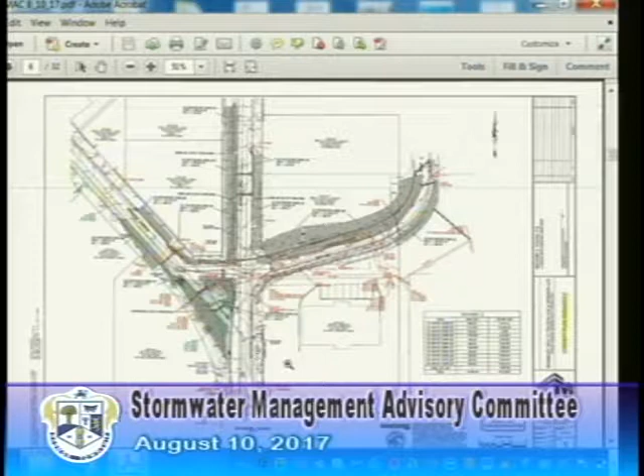I mean, at this point, I really feel like you're grasping at straws as to, well, maybe we can do this and maybe we can do the bank. So if we're not in a rush and we don't want to do this and we want to wait another 2 years, we can grasp at straws. Are we going to move forward? Or are we going to grasp at straws that this might work or that might work?

We have a plan that works. The board approved it. Madam Chairperson, could I make a suggestion? Because again, I don't feel like we're getting anywhere, I'm getting mixed direction. Well, yeah, we haven't decided anything.

Yes, that's just me speaking. If you folks move and take a vote to direct me to pursue X, Y, or Z, I can do that. Or if you want to pen a memo to the board directing X, Y, and Z.

Well, currently, this isn't on the agenda until September, you're saying? It was removed, so my guess is it'll be the first or second meeting in September. So why don't we continue this to our next meeting and have some feedback in between now? But your next meeting is after the first meeting of the... Yeah, so have it at their second meeting. That's not my call, Regina.

I make the request, I don't necessarily mean... because right now, I don't think we're going to come to any consensus tonight. I think if we get more information between now and then, we can have communication back and forth and have a clearer picture.

What more information are we going to get? We can't do anything until the board approves and gives Steve the go-ahead to talk to the bank, to pay T&M to do extra things. I don't see what additional information we're going to get in next month's meeting.

What'll happen is, if we decide that we want Steve to exercise those options, he's going to go to the board in September, because it's not going to make our meeting. It'll be the second meeting. They'll think about it through October. Come November, we might get some feedback, which would be really fast. And now we're into December, and we still are spinning our wheels with this project.